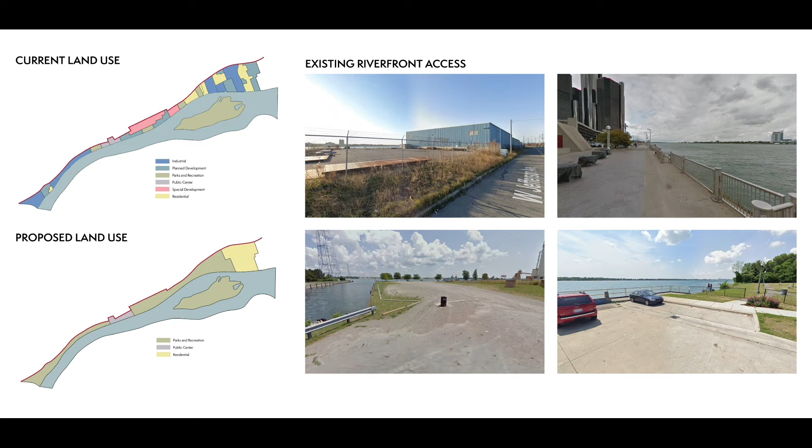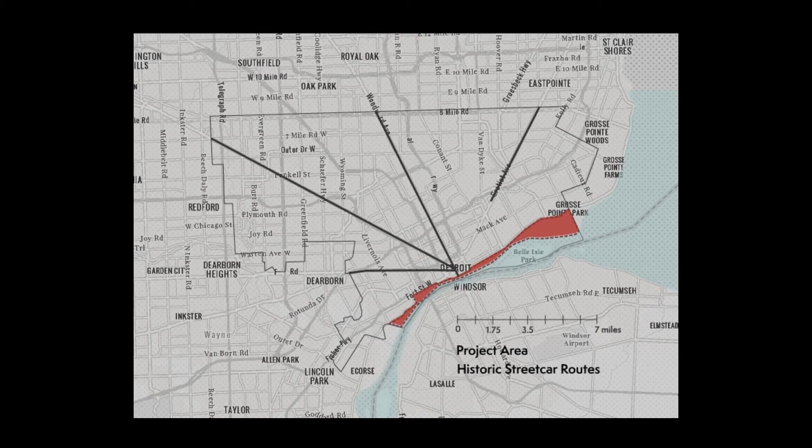When thinking about the year 2050 and the unpredictability of climate change, it makes sense to use that land more effectively, converting all the land to park space, allowing for more infiltration and carbon storage, plus creating a natural buffer for the river. To improve access to the river at a citywide scale, the electric streetcar will be expanded, reaching out into the neighborhoods of Detroit, leading to the new riverfront. Intersecting hubs will allow you to get across the city or to the river with ease.

This design intervention will allow for an alternative streetscape, transit hubs along the river, and a completely restored riverfront park system.

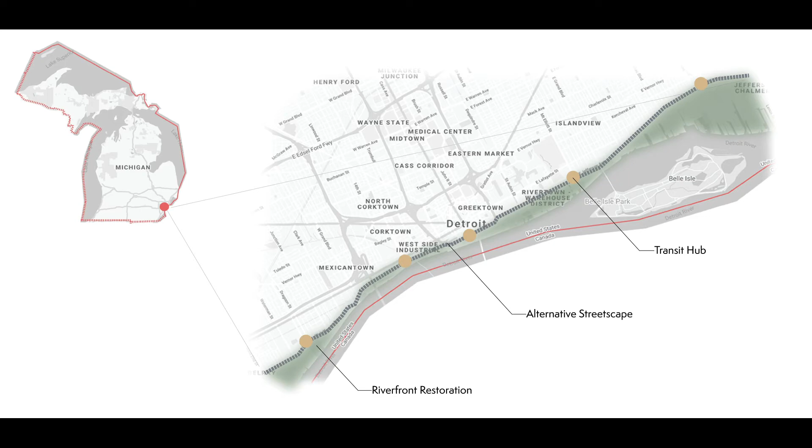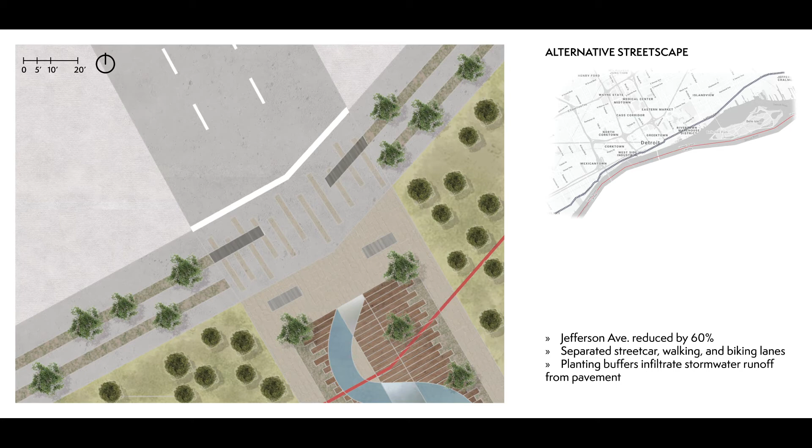The red line in this plan indicates the former extent of Jefferson Ave. This design has reduced that by 60%. Separated streetcar, walking, and biking lanes offer safe and efficient modes of transportation into the city, and as you can see, no cars allowed. Planting buffers collect stormwater runoff and infiltrate it to limit nutrients discharged into the river.

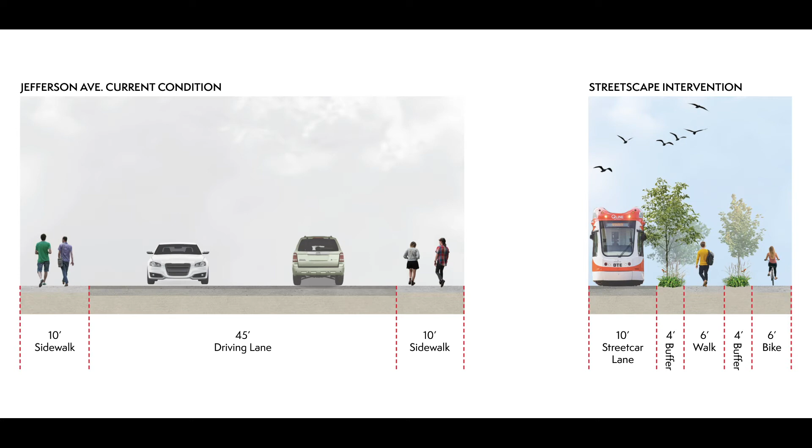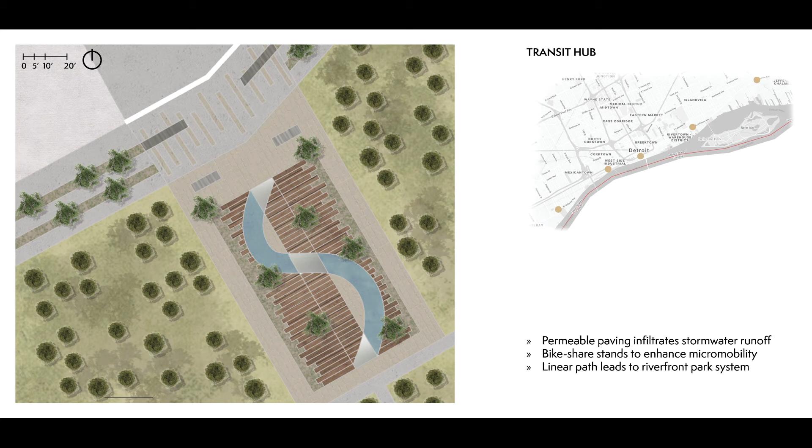Transit hubs are located at the intersection of streetcar routes along Jefferson Ave. Bike share stands located near the roadway allow you to hop on and get to where you are going quickly and conveniently. A linear path guides you through the riverfront park system to take a leisurely stroll and enjoy nature.

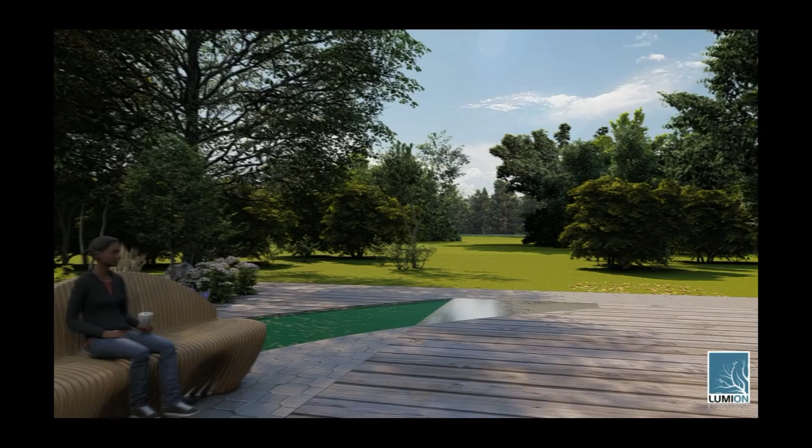This small section of riverfront alone will have 50 acres of new vegetation, the entire riverfront having nearly 3,000 acres. Three different ecosystems will be beneficial in infiltrating stormwater and storing carbon within native vegetation's root systems.

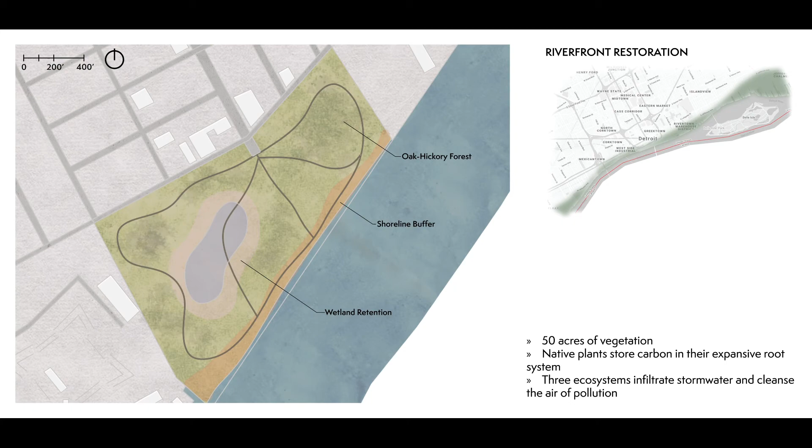Oak hickory forest was the natural ecosystem of the riverfront before urbanization. Oaks are a tremendous species for carbon storage and sequestration. Mixing slow and fast-growing tree species will maximize the carbon storing potential of the landscape.

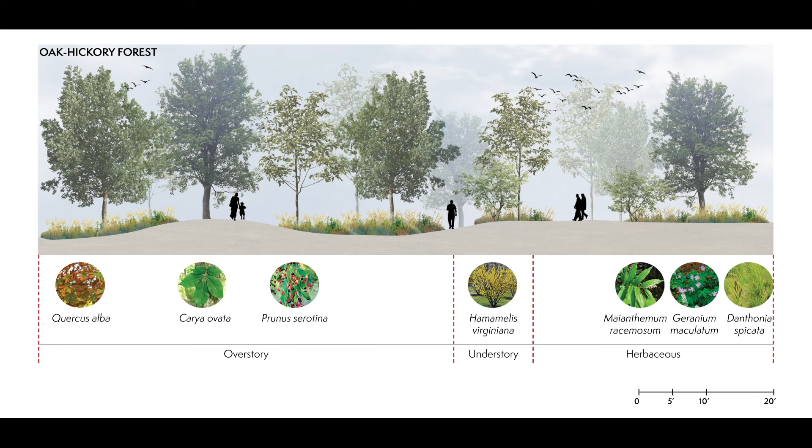Wetland retention ponds will allow you to see the landscape in action. Plants in the emergent and submergent zones, such as marsh marigold and blue flag iris, will filter out pollutants and clean the stormwater.

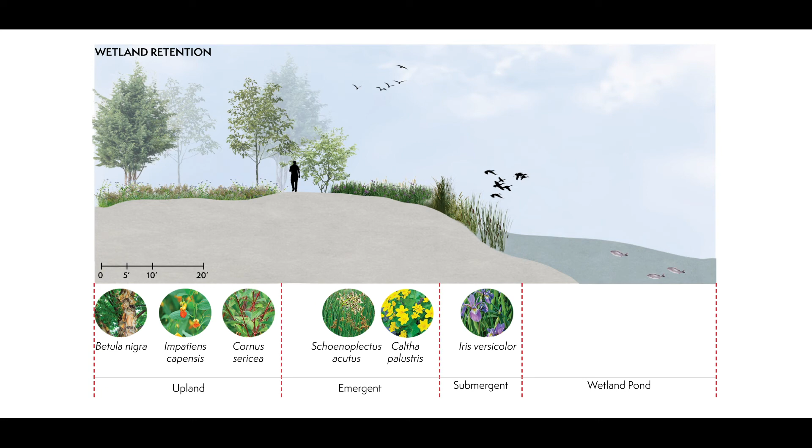Naturalizing the shoreline will act as a buffer during large rain events. These plants are chosen to withstand inundation but can adapt to fluctuating water levels. This zone will act as the final filter before stormwater hits the river.

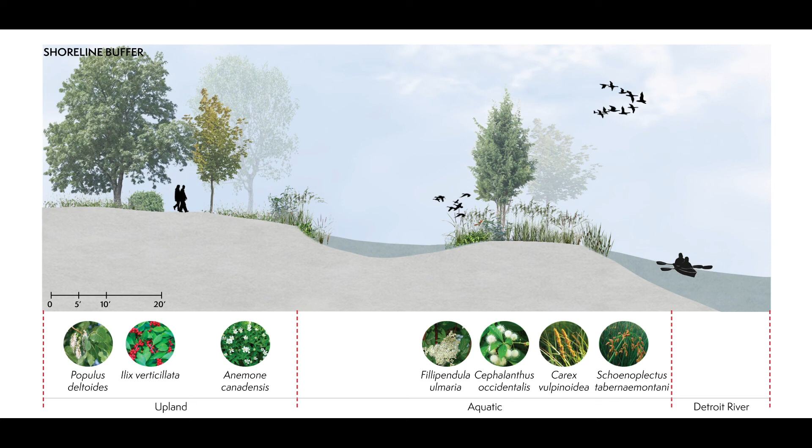As you just saw, the motorless city improves access to the riverfront, adding roughly 10 miles of new continuous park space. It also takes back the environmental harms that traditional transportation modes have put upon us, prioritizing stormwater infiltration and carbon storage. It's time we turn the motor city into the motorless city. Thank you.